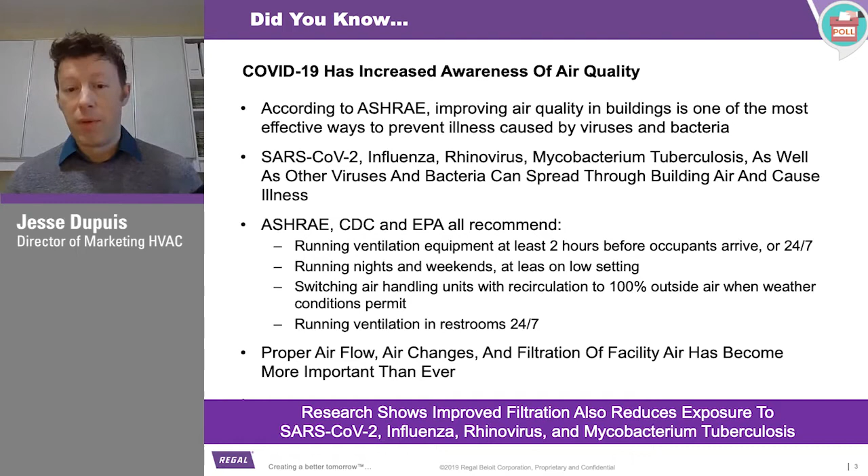This all comes down to proper airflow, proper air changes, proper filtration, and that's more important than ever.

So what do you do? If you look at the chart on the right, this is the risk of infection as a function of filtration. Obviously, we don't have a lot of systems or buildings that have zero filtration—there is some sort of filtration. From what I've understood about what New York has done ahead of this is you've made the move to MERV 13, which is what ASHRAE, CDC, and EPA are all recommending. I think you guys have done that. That's a 67% improvement over MERV 4 when you talk about risk mitigation from infection.

So it's a super important move. You guys have made that move from what I understand. If you have not made that move, obviously that's what we're recommending. That's the number one most important thing.

That said, when you think about improving that MERV rating, you're also increasing the resistance that the filter is placing on the system, so that's increasing things like static pressure. What that does is also put additional strain on all the components that have to pull that air across the filter—things like the belt drive, there's increased strain now on the belt drive. The motor, depending on what level of MERV you go to, you can actually overload the motor. So there's considerations that need to be made when you just make that filter upgrade.

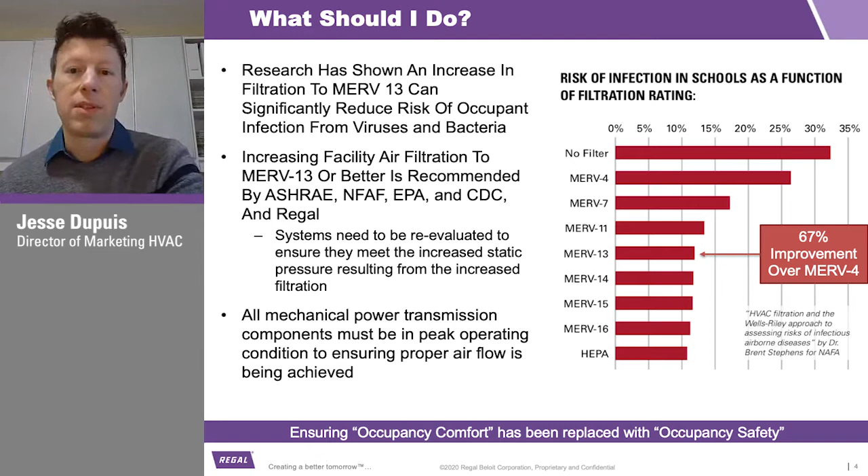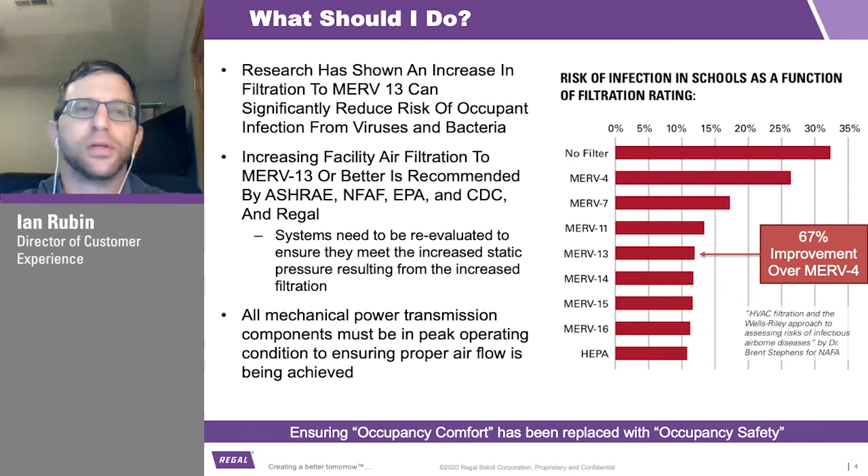So speaking now in terms of the belt drive specifically, again, we put together some best practice recommendations. The thing that's happened, obviously, like I mentioned, New York went through this back in the springtime. You're about to go through it again. It's happening all over the country, all over the continent, all over the world. This is the second, sometimes even the third wave that we're experiencing right now.

It's going to shut down a lot of buildings. People are going to work from home, so a lot of commercial buildings have been closed down or are operating at limited occupancy. When you shut down a building, when you shut down the systems on that building, either they're completely turned off or they're at a much reduced schedule.

Those things, especially if something's been turned off for a long period of time—belt drives are not intended to sit under tension for long periods of time. They're intended to rotate. And if you're not going to have that rotating, removing the belts is an important step to making sure that when you start that system back up again, you reinstall those belts and you're in good shape. Belts don't like to sit static, idle, for long periods of time. So there's a lot of stress on equipment in general when they've been turned off for a long period of time and you flip the switch and turn them all back on.

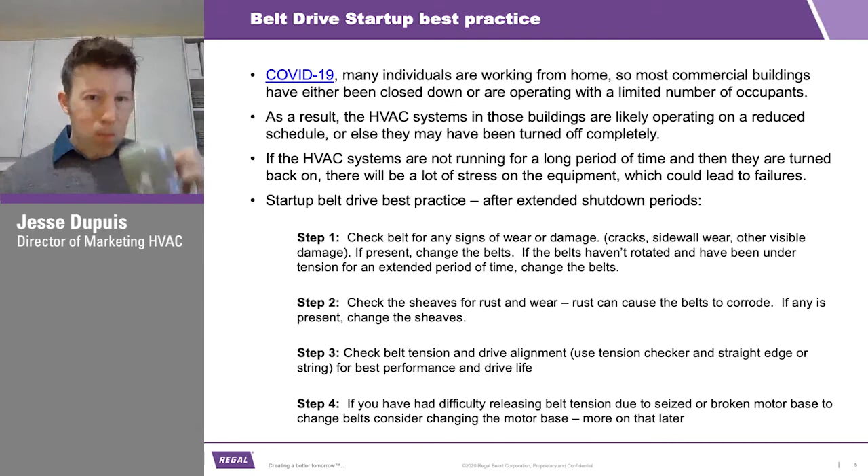All right, pause there for a second to see if anyone has any questions on this so far. Hey Jesse, it's Ian. Yep. Ian, also I just wanted to make sure folks know the poll question, the icon on the right-hand side. Just take a break. I think we've got 2 poll questions, one closed, one open. Yep, just double check that before we continue.

Yeah, and I did notice from the poll, what I'm seeing is about 50% of the people have actually made the upgrade to MERV 13 and 50% have not. So that's interesting.

Again, the importance of making sure that you're upgrading that filtration has a very significant impact on risk mitigation. What we're seeing right now with the cases increasing speaks to the fact that we, as professionals in charge of people's safety, need to make sure we're doing best practices to keep people safe. Increasing that MERV filtration level to 13 is a really important step.

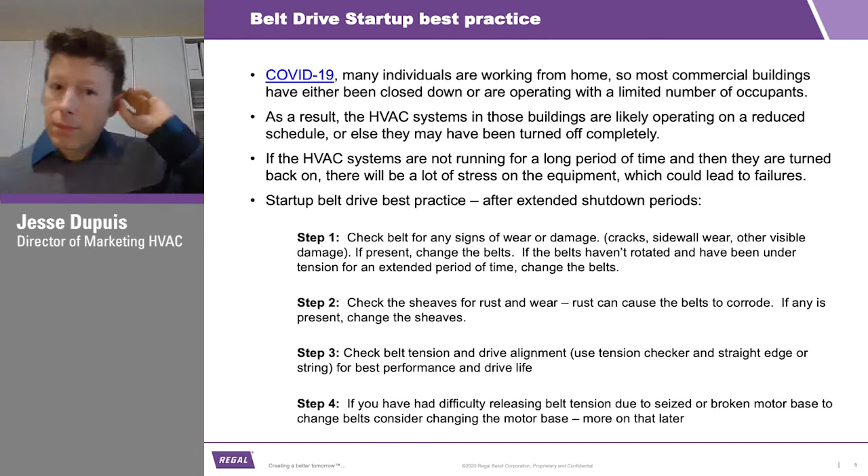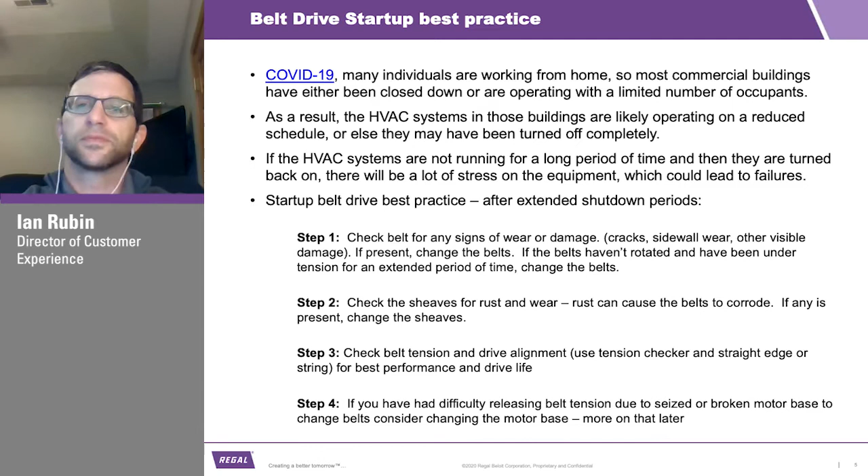And obviously I'm guessing that may have something to do with the poll question too, that folks are participating at a certain rate here. Yep, that's possibly true for sure. And then the first Q&A question came in, about how long should a sheave last, but I know there's a slide later on, so we'll get to that one. Yeah, absolutely, good question. That's a good segue for a later conversation.

Yep, very good. Okay, so let's talk now about when you increase that MERV rating. This chart at the top shows, if you remember going back 3 slides ago, that MERV filtration exponential curve of risk mitigation that happens as you increase filtration. This now shows the proportionate increase in resistance that MERV filtration has on the overall system, represented by the blue line. The red line represents belt drive efficiency.

That decay you see in efficiency is only there when you have a belt drive in what we consider a typical maintenance state, meaning worn sheaves, under-tensioned belts, and worn or used belts that have been on for quite a period of time. Belt drives in that state aren't operating at their peak efficiency to begin with.

Once you increase that MERV rating and increase the resistance on the belt drive, that decay is going to exponentially drop from an efficiency standpoint. So I'm going to speak to the importance of making sure all components are in peak condition so you can ensure you're getting peak performance. What you need to consider is belt drive tension, and you need to look at the belt type.

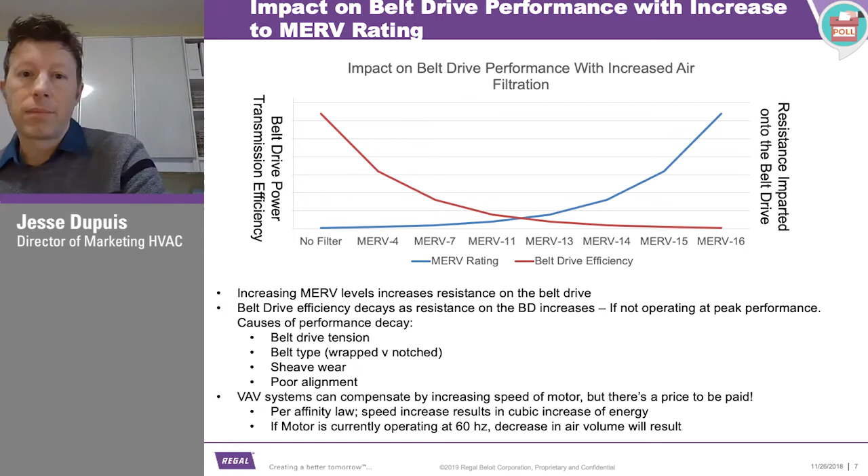All right, so let's get into the 5 specific steps now. Upgrading from wrap to notch, that's your first step. There's a 3% efficiency that can be gained in making that upgrade from wrap belts to notch belts.

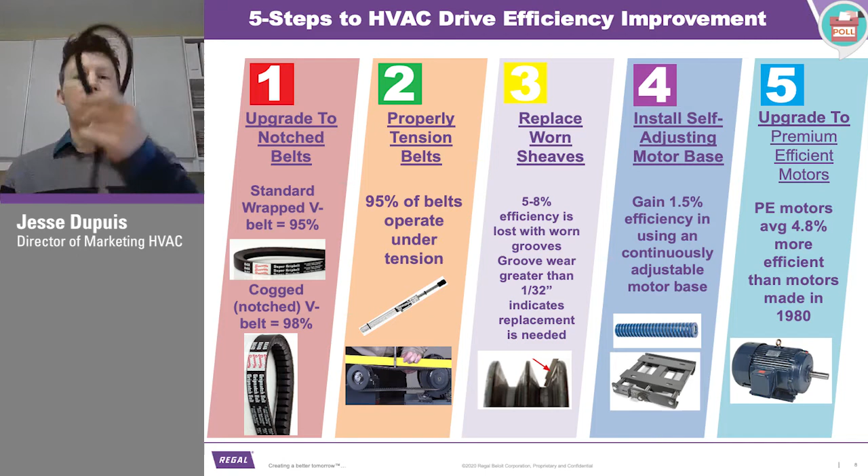I should note that wrapped belts have a fabric sidewall, smooth edged, no notches on the bottom. A notched V-belt - those of you that can see me, that's a notched V-belt right there, it's got notches. It's still a V-belt, it still fits into the angled sidewall sheave, but it's got notches. Now that's different than a synchronous belt, which actually runs on more of a gear type of pulley. Totally different system, so I wanted to make sure that distinction was known.

Tension - this is again one of the things that I think people overlook more than anything: how to make sure that you're operating at proper tension. You can lose 5% efficiency if this belt drive is under tensioned.

And then replacing worn sheaves. We'll talk about this more in detail, but you can lose 5 to 8% efficiency with lost or worn grooves in the sheaves. So again, we talked about a 32nd of an inch - if you've got that much wear, you need to replace it.

Step 4 then is a self-adjustable motor base. You can gain a 1.5% efficiency using a continuously adjustable motor base, and I'll get into that in a bit. And then the 5th step, motor efficiency.

One of the things that most people don't really think about when they consider upgrading a motor is efficiency - a lot of people don't upgrade a motor based on efficiency, they upgrade a motor when it fails. And the thing about motors is there's a lot of standards, NEMA standards and things that require manufacturers like Regal to make motors that are of a certain efficiency.

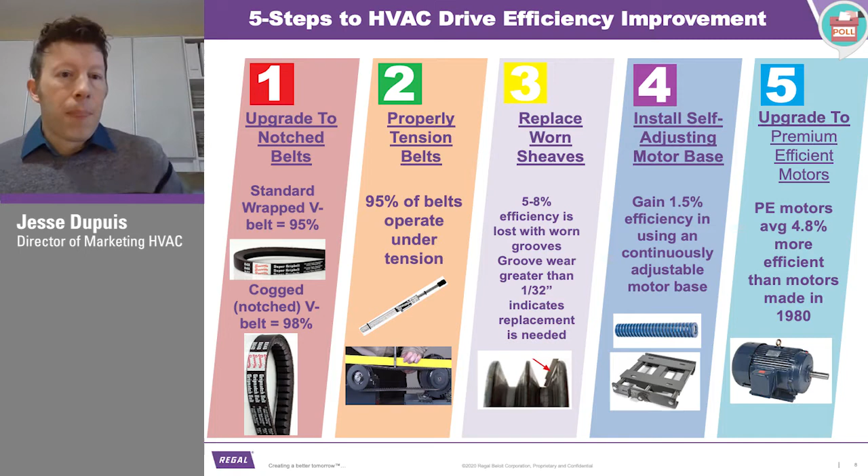Okay, getting into now the specifics of the belt.

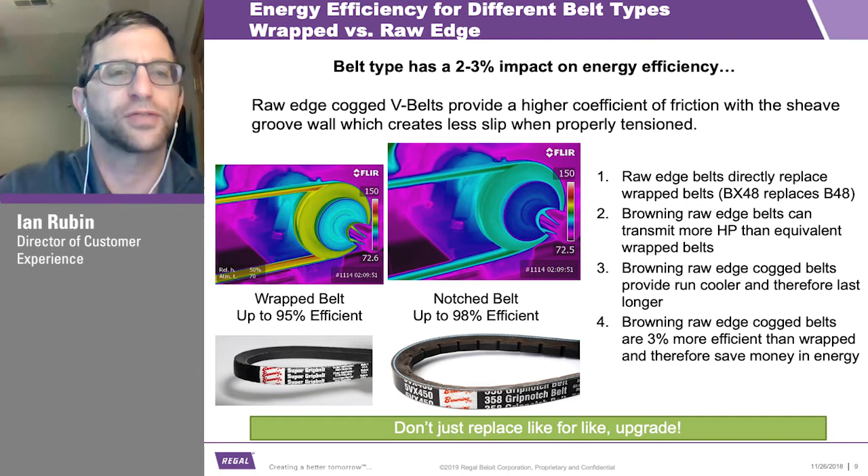Yeah, that's great. Energy efficiency in general translates in a bunch of different ways. Energy efficiency obviously means the more energy you're consuming, the more cost you're spending, so that's important.

Depending upon the individual audience, some contractors I've worked with have said my clients care about efficiency. They care about the electrical energy they're spending, and we look for solutions that help reduce or mitigate some of that cost. There are tools we have that can quantify and capture this and give you tangible numbers to present to your clients. Some buildings have dozens of belt-driven systems, and having the ability to quantify the energy savings by making very simple upgrades - nothing special, nothing fancy, not huge capital costs. Often these are just best practices you should be doing all along, and it's an easy way of quantifying that.

Speaking now about wrapped versus notched belts - here's a question I've had for years: why do people still put wrap belts on? Wrapped belts were designed probably 102 years ago and haven't been upgraded much in the last 30 to 40 years. Notch belts are much newer, but even those have been out for decades.

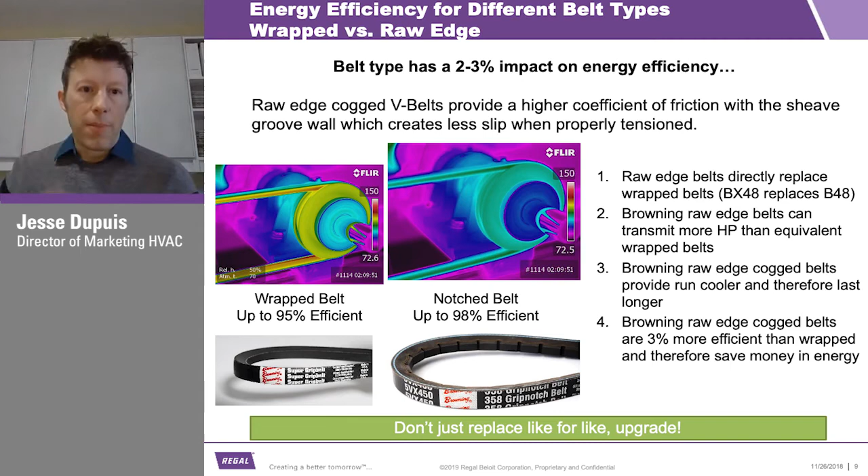Now let's talk about belt tensioning. This is one of those things that, if everybody were honest with me, they'd admit they don't really do the requisite retensioning that the manufacturer recommends. We recommend installing belts, tensioning them, turning them on, running for 20 minutes, shutting down, tensioning again, checking after 4 hours, checking after 8 hours, checking periodically thereafter, and retensioning at least every quarter. Most people don't do that. I get it, it's time consuming, but you'll decay efficiency for every percent of slip that increases.

If you roll on belts, or move the motor base back and forward to a preset location drawn on the frame, none of that really tensions the belt to the proper levels. You actually need to use a proper tension checker, and we recommend using one to make sure you're tensioning it to the correct number.

The other thing we'll mention in terms of efficiency is we've got a self-adjustable motor base. I'll talk more about that later. That helps maintain efficiency through the life of the belt.

95% of all belts fail because they're under-tensioned. That's from a poll we've asked so many users and contractors over the years, and compiled the results to determine that's the number one cause of failure. That failure is usually a result of improper maintenance or best practices when it comes to installation of the belt drive.

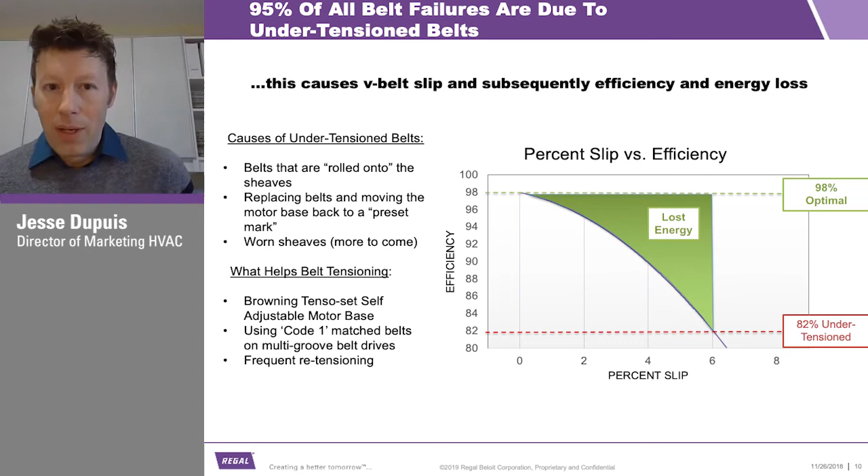I mentioned earlier that I had something new to talk about. Browning is about to launch a new notched belt, and we're very excited about this. This is probably the first really innovative advancement we have made in belt technology in at least the last decade since we went to EPDM rubber. Before that, it's been a quarter of a century since any real significant performance improvements have been made in belt technology. So this new Browning notch belt, we're calling it the Torq Titan.

This is the industry's first zero maintenance V belt. By that, I mean the cords themselves, the rubber material, and the means of adhesion of the top layer with the bottom layer are all designed such that you actually don't get stretch of the belt anymore.

We've also done things like FEA, finite element analysis, which is a means for us to determine where the stress points are within the belt. We designed this notch to be the most efficient notch design you can get out of a belt. You'll see many different notch designs from many different manufacturers out there, and this design is essentially the best of the best of the best. We looked at, I think, 30 different iterations of notch designs and tested all of them from a finite element analysis standpoint to determine what the optimal notch design was.

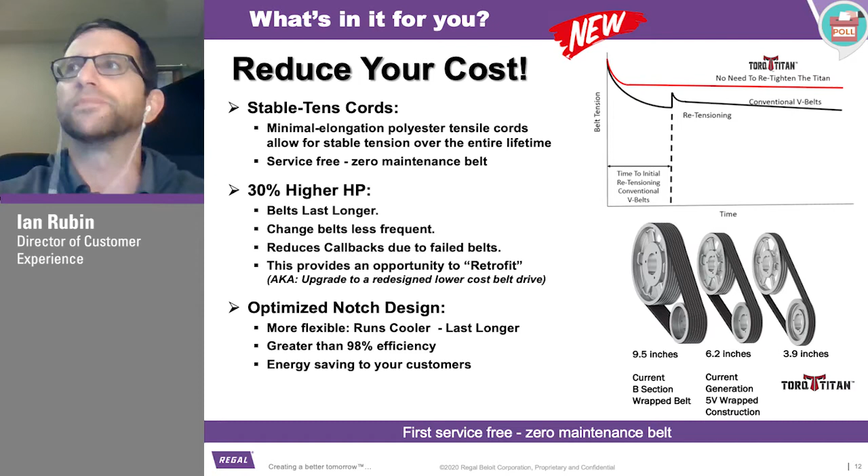Before you jump to the next slide, so the 5 steps for HVAC energy efficiency. Step one is upgrade to notched belt. The Torq Titan will give you a little bit of a benefit there, correct? Yep, correct. And then properly tensioning your belt is going to help with step 2 as well. Yeah, we're kind of killing two birds with one stone.

That's a good point. We've recognized a lot of the limitations and challenges people had in belt drives was maintaining them. That's really what went into the design of this new notched belt, to eliminate that need for constant retensioning, constant maintenance. And we've also managed to improve the overall performance of it. So you need less belts, less sheaves, all that kind of good stuff.

I just wanted to mention a couple of anecdotal things. In a time like this, when everything's kind of iffy in terms of what's going to be in the next year or two, a lot of the conversation, in a joking manner, is what's going to go away first, Shawn or belt drives.

This is a very interesting innovation, and I know many of you chiefs sit around in these conversations talking about capital improvements and whether we're going to use EC motors and direct drives. This is a situation where, from a maintenance perspective, not a capital perspective, you can put in a system that's highly efficient and very low on maintenance. Next best thing to an improvement like that, and eliminate that maintenance at the same time.

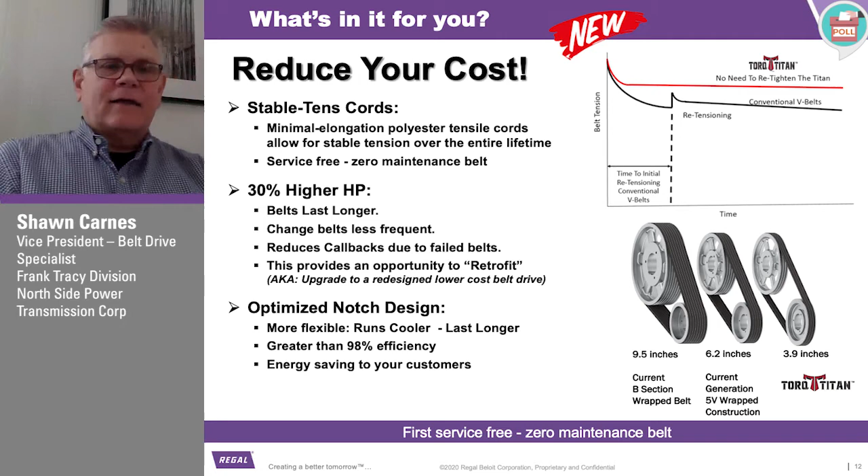So I was fascinated that these guys had undertaken this process of developing this V-belt. Jesse, can you go back to that last slide? Many of you chiefs remember a time when a synchronous belt drive came out, and the image looked very similar to what Jesse has on the lower right of his screen, where they would show a 5 or 6 groove B or C section belt, and then on the far right they'd show what was their synchronous drive - some companies call it HTD, some have another brand name I forget. It's a situation where some of you may have a connotation that far right belt might have been a synchronous drive, and that had some very negative connotations for you.

Just want to reiterate, and Jesse, you can expand on this, that this innovation - it's a BX or an AX belt - doesn't require a change in sheaves unless they're worn. There's no direct drive. And the thing that's impressive to me is the weight issue. Jesse, if you could expand on that a little bit, and also touch on 4L, 5L versus AB in terms of horsepower ratings, because I've had some questions on that in the field.

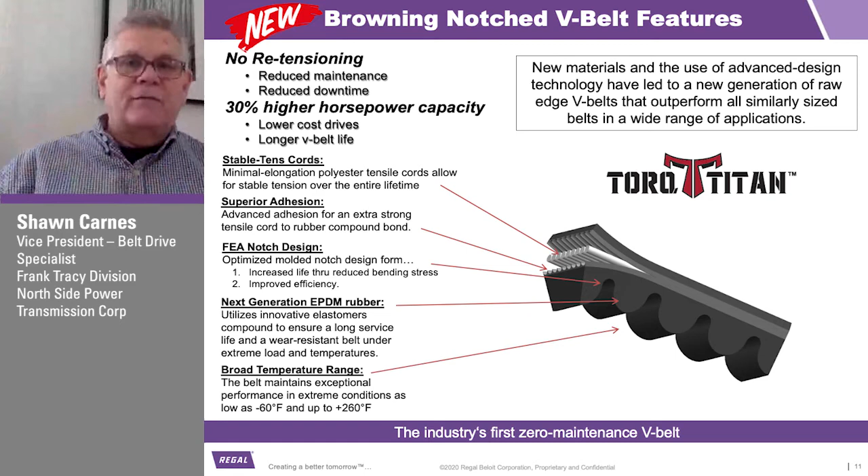Yeah, no problem. So I'm actually holding in my hand the new Torque Titan belt, hopefully you guys can see me. If not, it's really just the belt that I showed you on the prior slide. But to Sean's point, it's a V belt, so this is the same belt that will run in the same sheaves you've currently got. So if you've got an AX belt, a BX belt, a 5VX belt, a 3VX belt, you can make that simple upgrade to the Torque Titan by just changing the belts for the new one. It's a very simple upgrade.

And again, to Sean's point, we looked at where do we innovate, where do we spend our money in R&D. Some of the pushback I got was, well, if customers are all going direct drive, why are we going to spend a bunch of money on innovating a new V belt? My response was that I've got probably 20 more years of work in me, and I'm going to be retired long before we've designed out every single belt drive. The reason is because if I can operate a belt drive at 98% efficiency, and if I can remove all of the maintenance elements that are the negatives to a belt drive, a 2% gain in efficiency by going direct drive - how much is that really?

And what's the capital investment that you have to make? To put some numbers to it, if you got a 40 horsepower motor, that 2% improvement to go from 98 to 100 efficiency is worth a couple hundred dollars a year. And if you've got to spend $20,000 on a capital improvement project, or $50,000, you will never recuperate the money. Absolutely never. So I know there are a lot of applications out there where it just does not make sense to try to go direct drive.

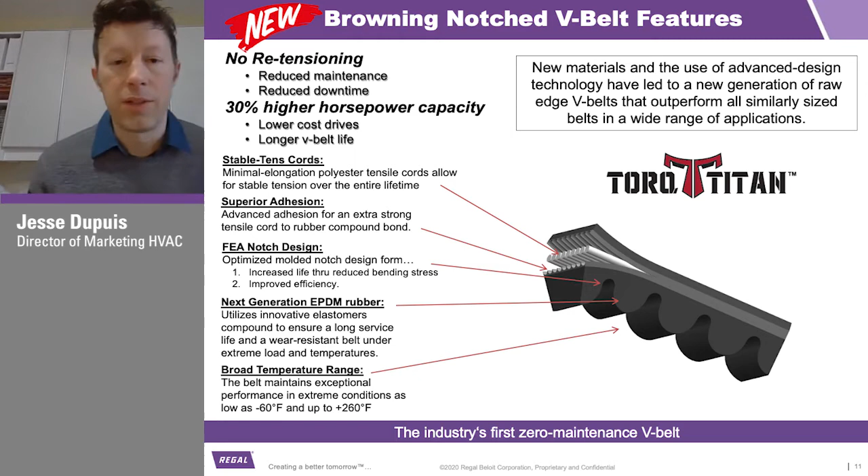Belt drives are easy to maintain. We have a huge network of belt suppliers and belt distributors all across the country that can help facilitate new belts, maintenance, repair, or replacement. So we don't really worry about customers saying, like with synchronous belts, 'where can I get that?' And synchronous is really noisy. Yes, it is. There's a lot of negatives.

We have synchronous belt drives, but I don't ever recommend them in an HVAC application. Our applications are heavy on noise, meaning it's important to not have it noisy. You don't want that vibration to go down the ductwork into the space and have people having to hear this. So this operates just as quietly as any of our current belt drives do.

Weight savings, Sean mentioned that. If you're able to reduce the number of grooves, we've gotten to a point—there's a bunch of applications I've retrofitted where it used to be 2 guys and a cherry picker putting that sheave on because it was so big and so heavy. And it dropped to a point where it was 1 guy, a big guy mind you, but 1 guy being able to pick it up and drop it onto the shaft. So there is a significant improvement in just the weight of these systems, reducing the amount of people you would need, reducing the amount of time you would need to install it. Again, it's better. It's just the next generation, and it's much, much better.

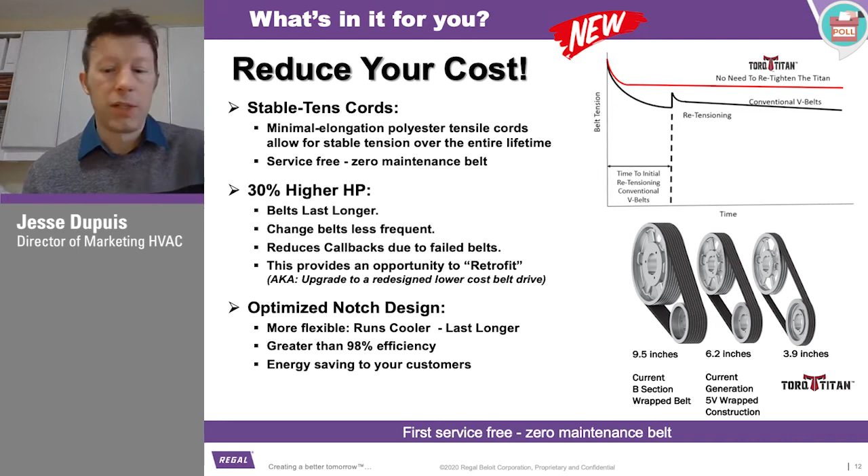So sheave wear. Jesse, I'll start the next poll question right now so they could answer it related to how often they replace sheaves. Yep. The last poll, 100% said energy efficiency was important. Not everybody answered it, but a majority of the people did. So there was an importance to energy efficiency, definitely. Yeah, and everybody said it was very important. So that's good to see.

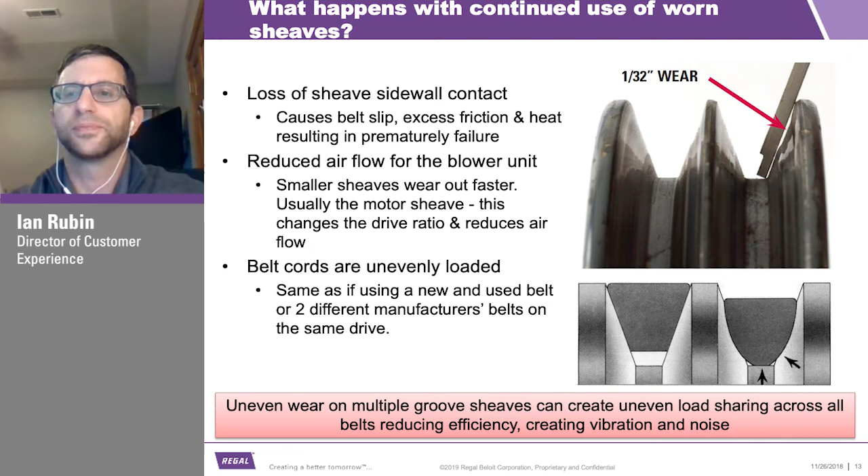So pivoting now, talking about sheave wear, I'll answer that question that came in. Sheaves should be replaced after 5 to 7 years of service. I'm answering the poll question, by the way. So, sheaves should be replaced after about 5 to 7 years of service. If you think about the buildings—I've been to a lot of buildings, especially in New York—and I've learned that some of the sheaves are the same age as the buildings. So it's definitely something... we're not naming any names, right Jesse? Nope, we'd never do that. Absolutely not. Not pointing fingers here.

It's one of those things where it's, again, another misconception. A lot of people think that sheaves don't wear out, right? I mean, it's steel or iron, and we're talking about a rubber product running on it. So why would the iron wear? Why would that wear out? And really, if you think about it, both materials are wear items. Sheaves wear, belts wear faster mind you, but sheaves do wear out.

And for those of you that can see me on the screen right now, I'm squeezing the top of the belt and the bottom of the belt, trying to deflect it. And it's hard—belts are actually, even though they're rubber, really, really hard rubber. So they actually don't conform to a worn out sheave like you would think they would. And what happens is you don't get full engagement of the belt against the side of the sheave, and therefore you don't transmit the right power. So again, you're causing slip, you're causing heat, and you're causing inefficiency. That all reduces the airflow.

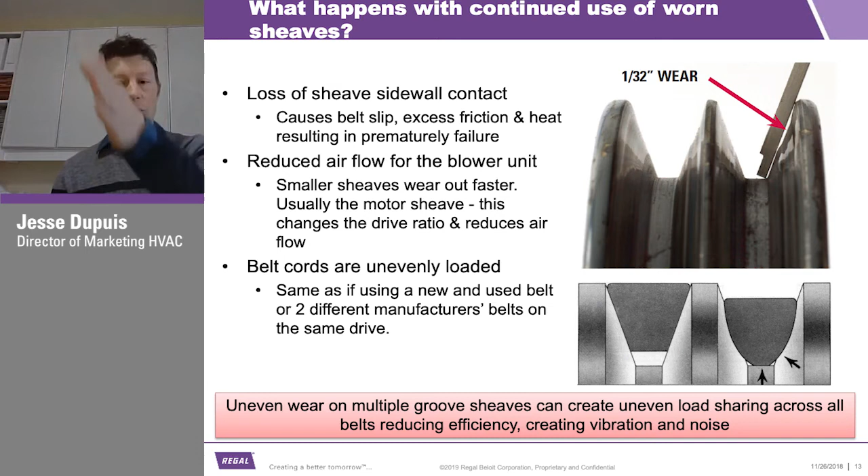So really what we recommend is using a groove gauge. Stick that groove gauge in the sheave, shine a flashlight behind it, and if you can see daylight between the groove gauge and the sidewall of the sheave, it's worn out. You can also check it with a straight edge. That's very typical of the form of wear you'll see, right in the middle section where the cords actually contact the sheave. That's where they wear out.

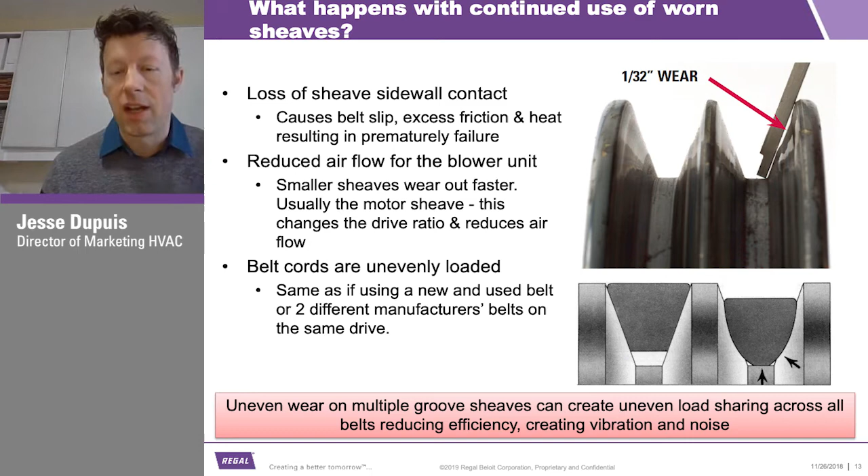All right, so I mentioned this a couple of times. Self-adjustable motor base. Browning actually designed and developed a self-adjustable motor base, which takes care of a lot of issues, a lot of problematic challenges of typical belt drive maintenance and installation.

How many people, if I'm asking honestly, how many people roll on belts? Again, most people would say they do. And you roll on belts for a number of reasons. You roll on belts because the motor base might be seized. You roll on belts because you don't have enough time. There's a lot of reasons. You roll on belts because you just don't know any better. The guy before you did it that way, he taught you, you do it that way.

Fact of the matter is, if you roll the belts on, you're actually going to fracture some of the cords of the belt. And if anyone's ever had a belt in an application where it's rolled off, the belt's literally spun out of the sheave and you see the belt on the floor, that's because you rolled it on, you fractured a few of the cords on one side, it loaded fully on the other side, and it just spins out.

That's just what happens. So we've designed this self-adjustable motor base to run on two linear rails on each side, with a central point where you change the tension. Most motor bases walk forward and backward as you're tightening a bolt on each side, and that walking makes it very difficult to increase or decrease tension, to put the belts on or take them off. It's a challenge. So we've put a central threaded rod in the middle that you can use an impact gun on, if you want, and hammer that thing on and off. Just do it carefully, but it's much, much faster.

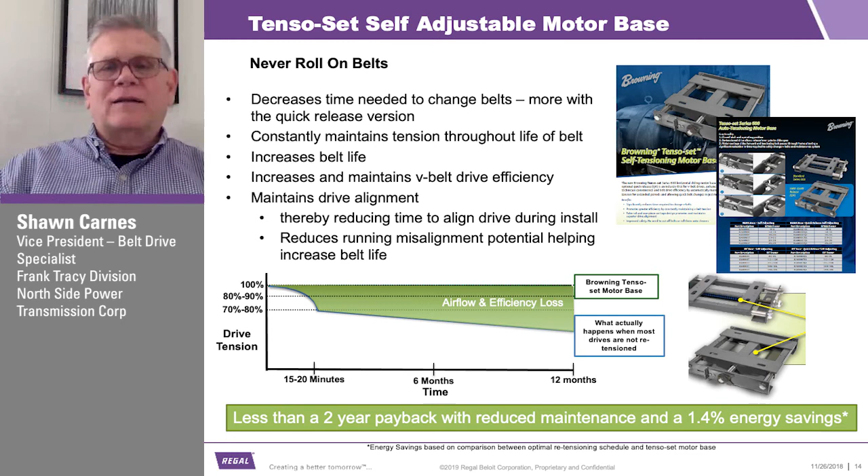Yeah, really easily. How long does a belt last? If your belt's lasting less than a year, you have a tension problem. We have designed our belts to last 3 years at continuous service. So if you're not getting 3 years out of the belt, then you have a tension problem.

Dust, sidewall dust, as you mentioned, is a good one as well. If you're getting premature wear on the motor sheave, that's also a sign that you don't have proper tension. If you have uneven wear, that's a sign you've got improper tension. Alignment can also result in that. If you've got one groove that's wearing more than the other, that's improper alignment and improper loading.

So there's a bunch of indicators that can tell you whether or not you have proper tension. But one of the other ones is when you look at the belt when it's running, if it's jumping, vibrating or pulsing, that's another indicator. So if you see any of those telltale signs - belt dust, belts not lasting very long, vibrating or oscillating in service - those are indicators, and the self-adjustable motor base can help address those.

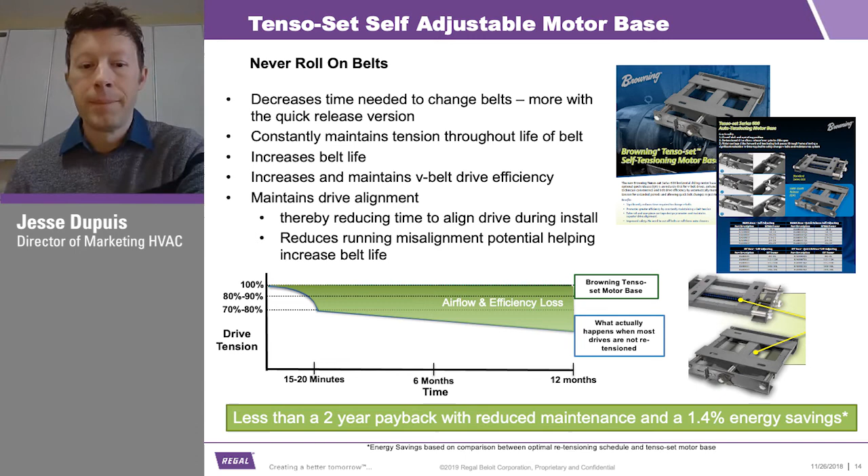Okay, so wrapping all that up, taking all those nuggets we just talked about with the 5 steps, replacing like for like versus retrofitting. We talked about the higher horsepower carrying capability of the belts. We talked about the need for replacing worn out sheaves. All of that allows us, instead of just changing out like for like, the opportunity to redesign and optimize the system for you.